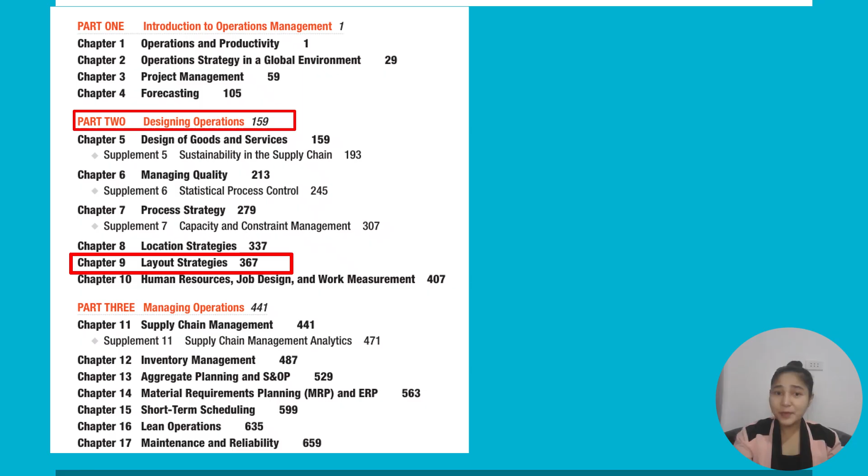By the end of today's class, you will master three key things. First, what layout actually means in business terms—it is way more strategic than just where stuff goes. Second, we will explore the different types of layouts, from your local Jollibee to SM's massive malls to Mercury Drug's efficient store operations. Third, we will dive into the math behind it, specifically how to design process layouts and balance assembly lines. Think of this as your toolkit for solving real-world space and efficiency puzzles that every manager faces.

So what is layout? Well, layout is not just about making things look pretty. It's pure strategy. Think about when you walk into a Jollibee versus a traditional Filipino carinderia—same goal, feed people, but completely different layouts. Jollibee's counter system gets you in and out fast, while the carinderia lets you see all the dishes spread out to tempt you. That is layout in action. Every choice about where to put equipment, people, and workstations directly impacts productivity, costs, and whether the business hits its targets.

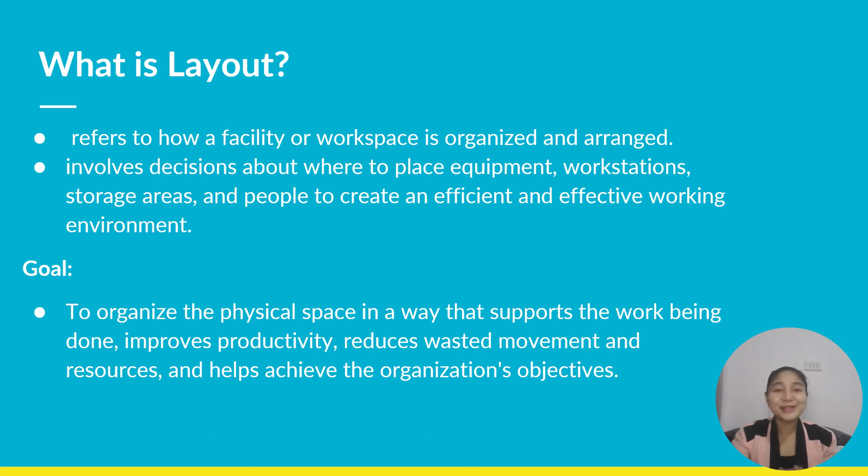Now notice retail layouts—this is where psychology meets business. The core principle is very simple: sales and profitability vary directly with customer exposure to products. Retailers strategically arrange items to catch your eye and encourage you to buy more. A perfect example is, why do you think SM Supermarket puts the milk and bread at the back of the store? It's because they force you to walk past hundreds of other products first. Every aisle, every shelf placement, every end cap design is calculated to maximize your spending. So at the end of your grocery trip, you think, oh my god, I don't need this, but why did I buy this? That is the strategy of every grocery or department store.

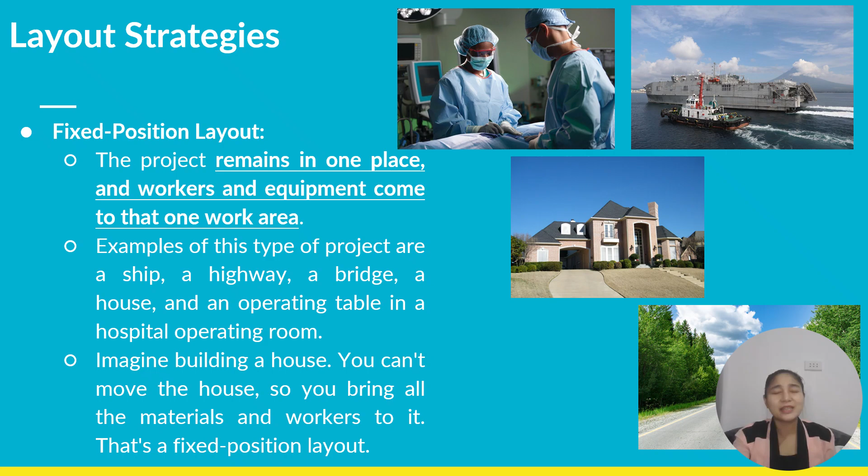You cannot move a patient mid-surgery or drag a half-built ship around the dock, right? So instead you bring all materials, tools, and specialists to that one location, it is like hosting a dinner party and the kitchen stays where it is, but you bring all the ingredients and helpers to it. That is an example of a fixed position layout.

Now let us proceed with the process-oriented layouts. It handles wide variety by grouping similar functions together. Take note: grouping similar functions together.

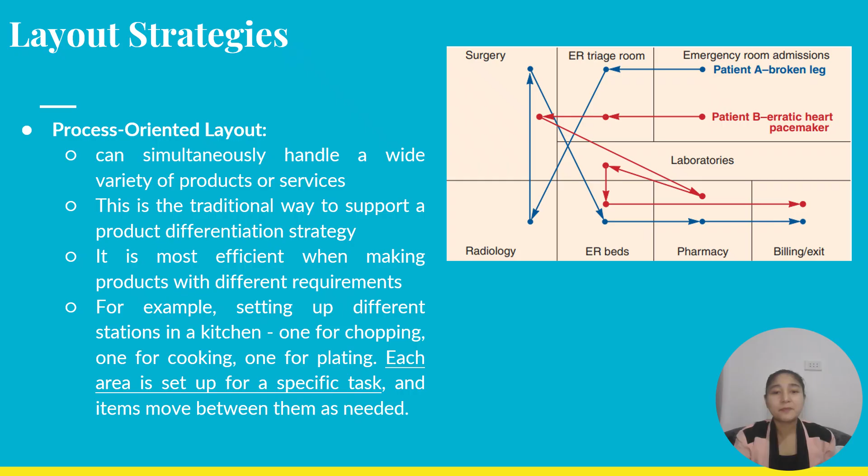Notice this hospital emergency room diagram. Do you see how patient A with a broken leg follows the blue path through triage, radiology, surgery, then to pharmacy? While patient B with heart issues takes the red route through different departments. Each area, such as surgery, radiology, and pharmacy, is set up for specific tasks, just like having separate kitchen stations for chopping, cooking, and plating. So patients flow between departments based on their unique needs.

So let's go to these work cells. Work cells completely revolutionized traditional manufacturing by reorganizing people and machines from scattered departments into focused, self-contained teams.

Look at these diagrams. The bottom diagram shows the old way: linear assembly lines, where workers stand in a row, each doing one repetitive task.

As you noticed, the top diagram shows you a work cell, with workers arranged in a compact U-shaped or circle around the materials and equipment. Here is why this matters.

In the traditional setup, if one worker is absent or a machine breaks down, the entire line stops. But in work cells, team members are cross-trained on multiple tasks, so they can help each other and adapt quickly. The U-shaped design means shorter walking distances, better communication, and faster problem solving.

These cells are used when you have enough volume to justify dedicating equipment and people to one product family, like all variants of iPhone cases or different sizes of the same jeepney part. The beauty is flexibility. When demand changes or you need to switch to a new product design, you can reconfigure the cell quickly without disrupting the entire factory. It is like having specialized teams that can pivot fast while maintaining quality and efficiency.

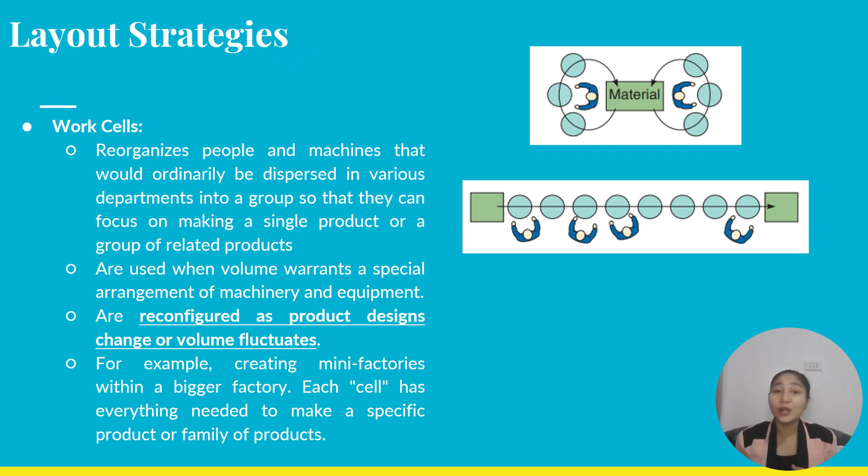Let us try this one wherein we improved work cell A and work cell B. Note that in both A and B, the U-shaped work cell can reduce material and employee movement. The U shape may also reduce space requirements, enhance communication, cut the number of workers, and make inspection easier.

So let us focus here in work cell A. In work cell A, this is the current layout wherein the workers are in small closed areas. Then we improved this work cell wherein we cross-trained workers that can assist each other and may be able to add a third worker as added output is needed. So from this current layout, we improve it to this layout.

Now, as you can see in these diagrams, I want to explain in detail. We're still in work cell A, wherein there is a transformation from isolated to collaborative work. As you can see in this left diagram, kindly focus on my pointer to follow. It really shows the current problematic layout, as I said earlier. Workers here are trapped in small, closed areas around the material section.

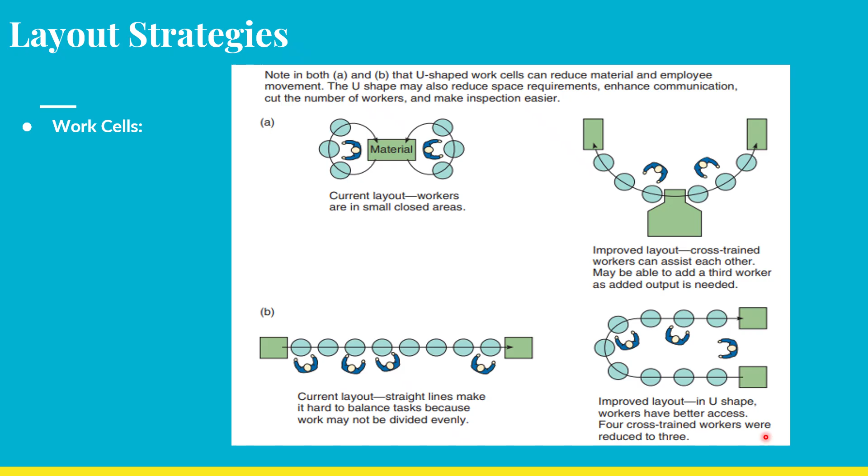So the key breakthrough here is that 4 cross-trained workers were reduced to 3. As you can see, you have 4 workers and then it is reduced to 3, that's a 25% labor reduction while maintaining the same output. This happens because workers can share tasks, help each other during busy periods, and eliminate the wasted time that comes from rigid job assignments. This U-shape is revolutionary because it combines the efficiency of specialization with the flexibility of teamwork.

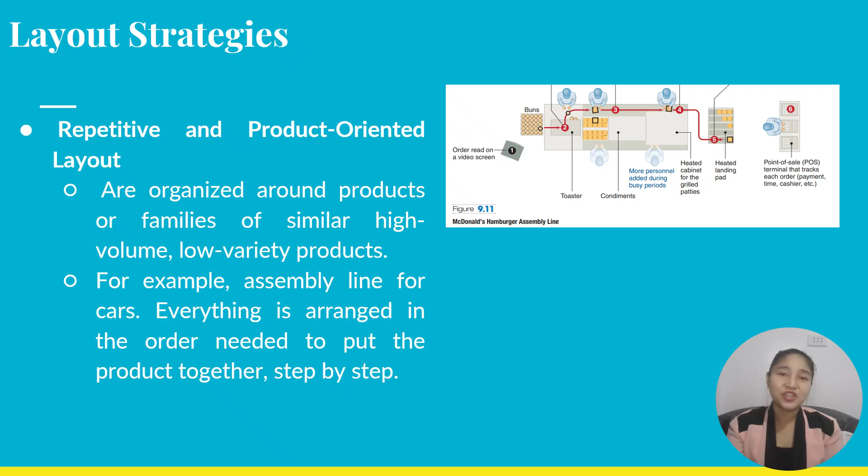So let's proceed here to the product-oriented layouts. It comes in two types. The first one is the fabrication lines, which builds individual components on a series of machines, like how San Miguel Corporation makes bottle caps, or how steel mills roll metal sheets.

The second one is the assembly lines, which put those fabricated parts together at workstations, like how Mitsubishi assembles jeepneys in their Cainta plant in Manila. The key challenge for both is achieving perfect balance. Every workstation must take the same time, or you create expensive bottlenecks. There should be a balance so you have no bottlenecks at all.

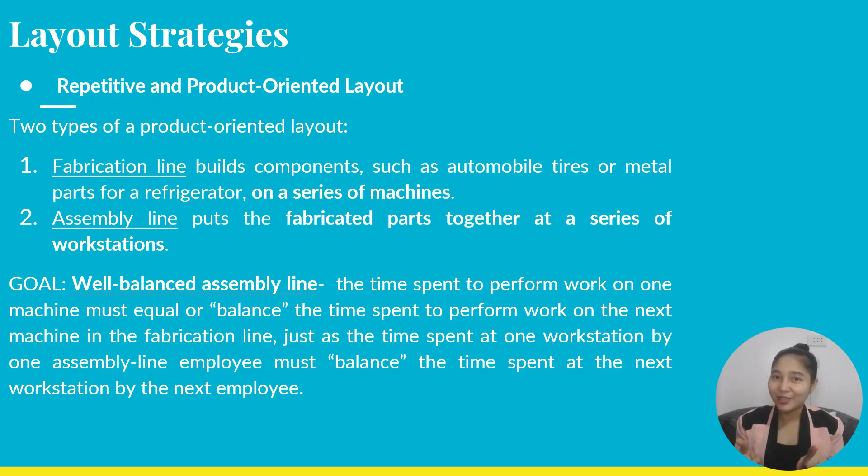So a good layout requires careful planning of three critical areas. The first one is the material handling equipment, deciding whether you need conveyor belts like in Jollibee kitchens, cranes like in shipping ports, or robot carts like Amazon warehouses. Second is the capacity and space requirements, figuring out how much room people and machines need to work safely, considering the noise, the temperature, and breathing room around the equipment.

And finally is your environment and aesthetics, making the workplace pleasant with proper windows, plants, and walls that would improve airflow, reduce noise, and give workers privacy.

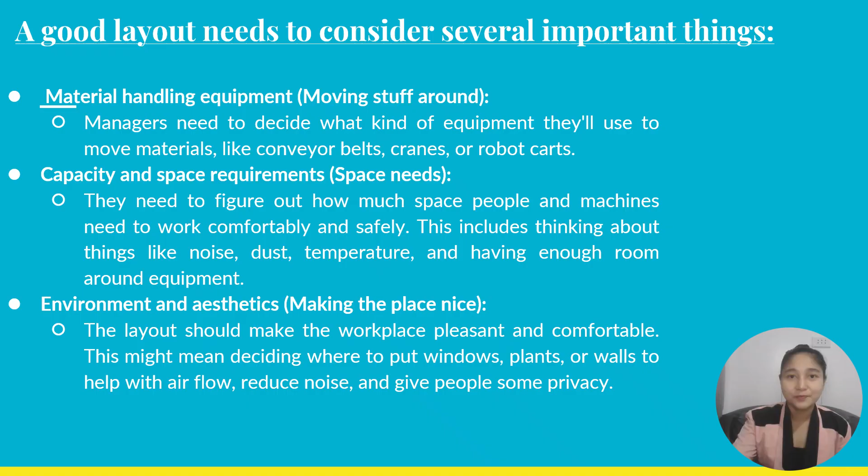So two more critical layout considerations. The first one is flows of information. The layout must help people communicate easily. This means deciding whether to use open offices for collaboration or private ones for focused work, and positioning teams that work together near each other.

Now, the second is the cost of moving between work areas. Some materials are trickier to move than others. Moving hot metal in a steel plant requires special equipment and shorter distances, while moving paperwork is very easy. Smart layouts put areas that exchange difficult to move materials right next to each other.

Okay, so how do you actually evaluate if a layout is working? Think of yourself as a detective. First, go walk around the facility. Do not just look at blueprints. You have to get your feet dirty and see what is really happening.

Then work through your checklist systematically, jotting down specific observations, like workers are constantly bumping into each other here, or this machine sits idle half the day. So be honest about what is working and what is a mess. Your final report should tell the real story of whether this layout is helping or hurting the business.

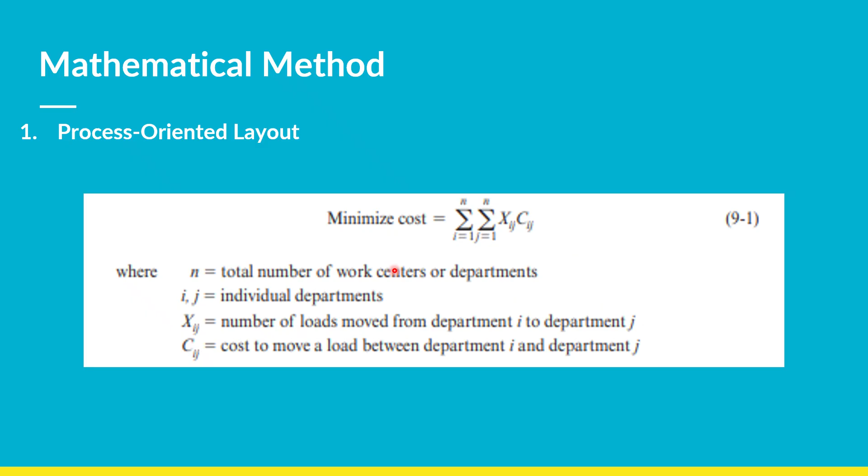Okay, so let us try this real world problem. Walter's company management wants to arrange the 6 departments of its factory in a way that will minimize interdepartmental material handling costs. So they make an initial assumption to simplify the problem: each department is 20 by 20 feet, and the building is 60 feet long and 40 feet wide.

So before we solve the problem, let us define what the problem is really all about. The problem is Walter's company wants to arrange 6 departments in their factory in order to minimize the cost of moving materials between departments. So that is the problem.

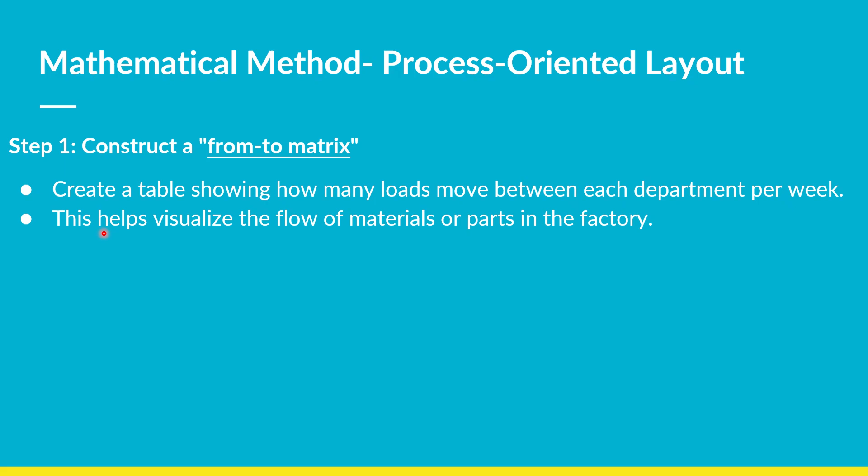So let us proceed to the next step of solving this problem. The first step is we will construct a from-to matrix, for example from assembly to painting, from assembly to machine, from assembly to receiving departments. This is an example of a from-to matrix. As you can see, we create a table showing how many loads move between each department per week, and this will help us visualize the flow of materials or parts in the factory.

So let's see how to read this from-to matrix. For example, how many loads are you going to transfer from painting department to receiving department? So how do we do that? Here you have the painting department, and then you will transfer the load to receiving department. Now the question is how many loads are you going to transfer? So here it shows 50 loads. That is how you read the from-to matrix.

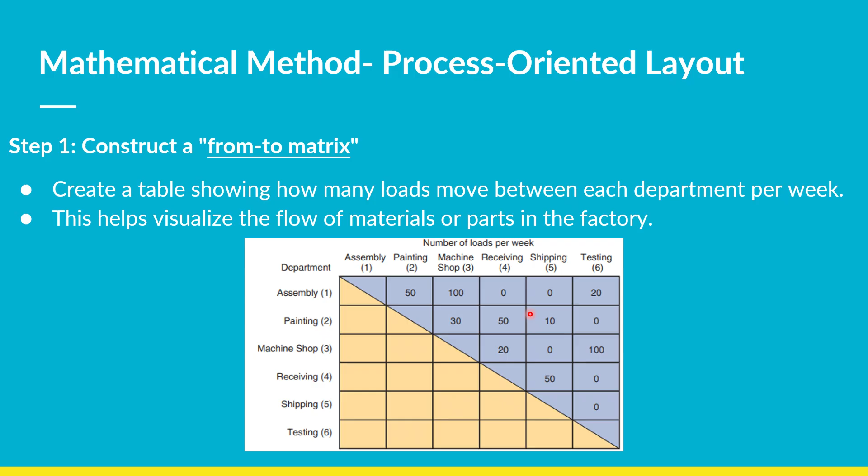Okay, so now let us proceed to step 2. In step 2, we determine space requirements, figuring out how much space each department needs. Then we have to draw a layout, like a top view, to make it easier to divide the building into areas for each department.

As given in the problem, you have 40 feet by 60 feet. This is the current layout of the departments. You have the assembly line, and beside the assembly department is the painting department. Then beside the painting department is the machine department, and beside the machine department is your testing department, and so on and so forth.

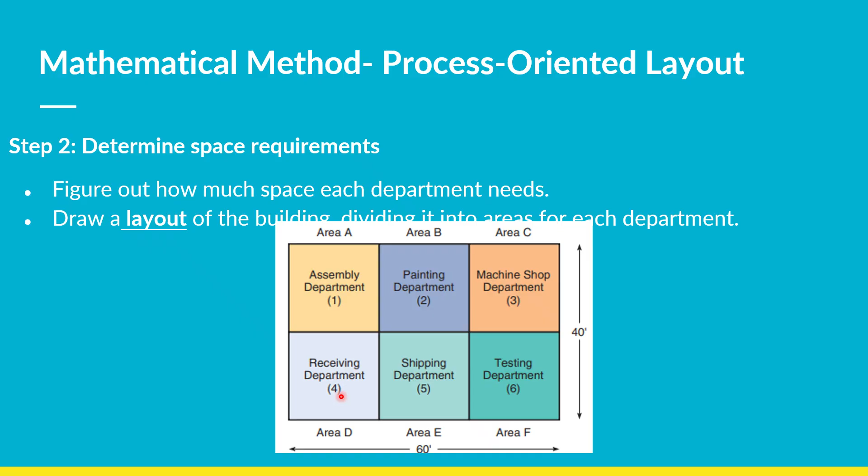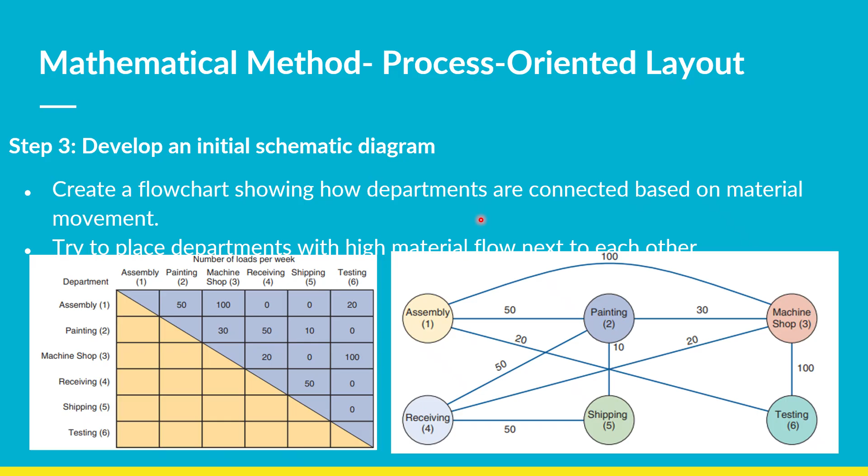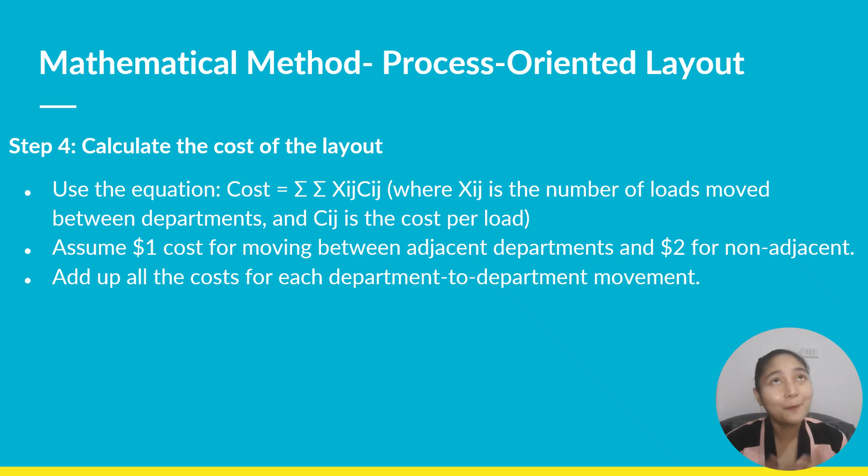Step 4 is where we crunch the numbers using our formula. We take each department pair, like assembly to painting with 50 loads, and multiply by the movement cost. If they are adjacent or beside each other, we assume $1 per load. If they are non-adjacent, we assume $2 per load. So assembly to painting might cost 50 loads times $1 equals $50 if they are neighbors, or $100 if they're far apart. We add all these individual costs to get our total layout cost, then compute different arrangements to find the best one that gives us the optimal layout cost.

So let us start. We will calculate the cost of these layouts. This is our original layout. Now, calculating the costs for each department pair using the from-to matrix and the layout, because the layout will help us identify if departments are adjacent to each other. Let's start with letter A.

In letter A, it says assembly to painting. We have here 50 loads. We check the layout to see if they are adjacent to each other. Assembly to painting, yes, they are adjacent. That's why the cost of moving the loads is 50 loads multiplied by $1, giving a total cost of $50.

Let's proceed to letter B. It says assembly to the machine. Now let us check in the layout if assembly and machine are close to each other.

So, assembly and machine. As you can see, they are not close to each other, or they are non-adjacent departments. That's why the cost of moving 100 loads is $2. You just multiply it, so that's why you have $200.

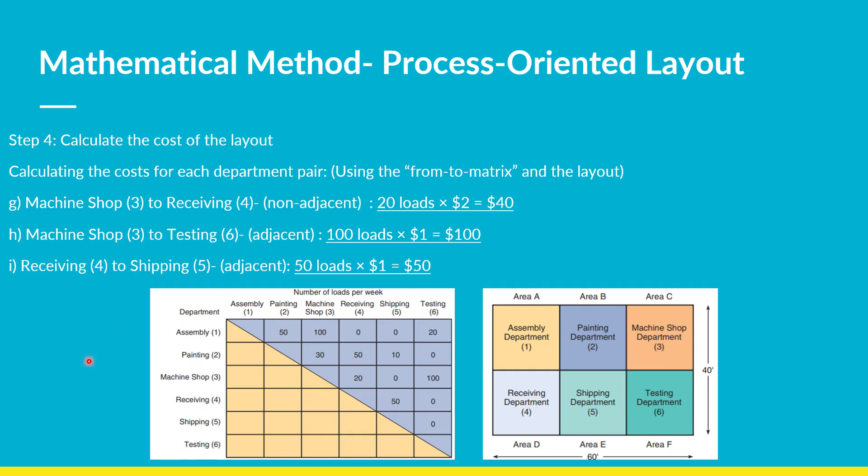So we will continue with the computation, the same process as what we did earlier. Once we are done computing the cost of movement for every department, we sum it all up. After adding it all up, we have $570. This means that this total of $570 represents the cost of moving all loads between departments in the current layout. But our goal is to find the optimal cost, so how do we do that? Maybe we can try rearranging the departments to find the minimum cost.

Since our goal is to find the minimum or optimal cost, step 5 is to improve the layout. We look for ways to reduce costs by rearranging departments. In this case, we switch assembly and painting to bring assembly closer to the machine shop, because we will be transporting higher loads from assembly to machine. Then we recalculate the cost with this new arrangement or layout.

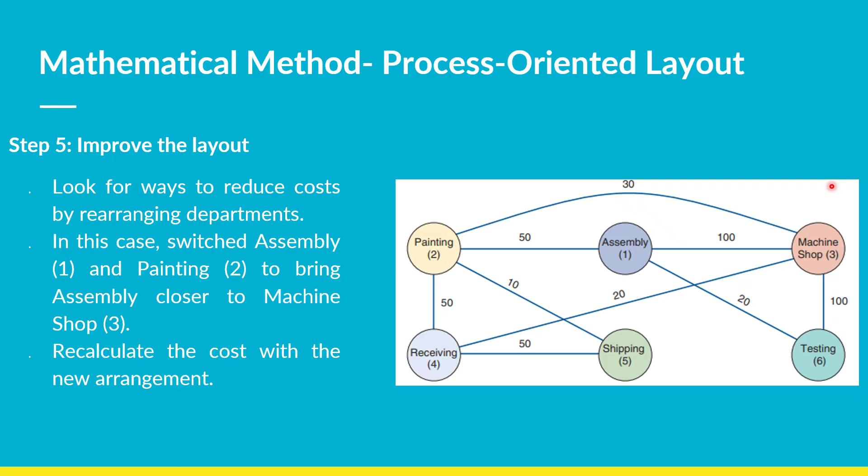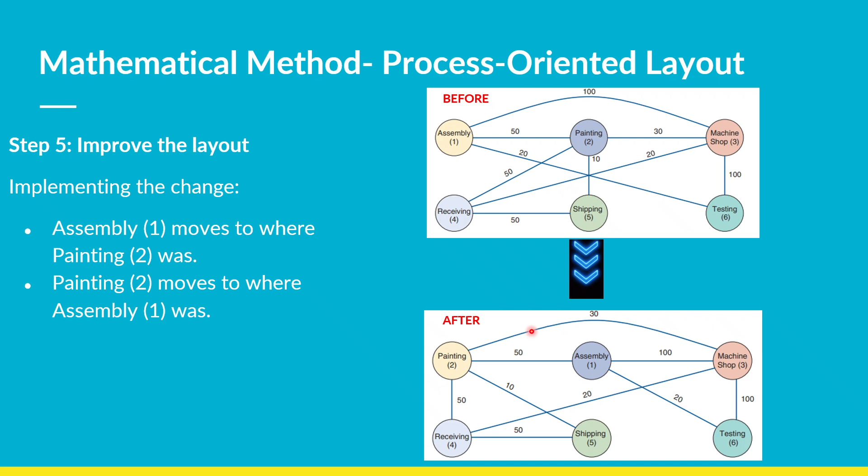So after implementing the change, this was our schematic diagram before the rearrangement. From assembly 1, it moves to where painting is, so we just switch them together. That's why our new schematic diagram is this one. We just follow the same process of computing the costs of movement of the loads from each department, multiplying the loads by the cost per movement. So how do we do that? Let me just do a quick review.

Let's say, for example, from assembly to machine shop. Assembly to machine shop has 100 loads to transfer. Now, as you can see, this is our new layout, and in this new layout they are just adjacent to each other, so the cost here is $1. We just continue the same process for the computation.

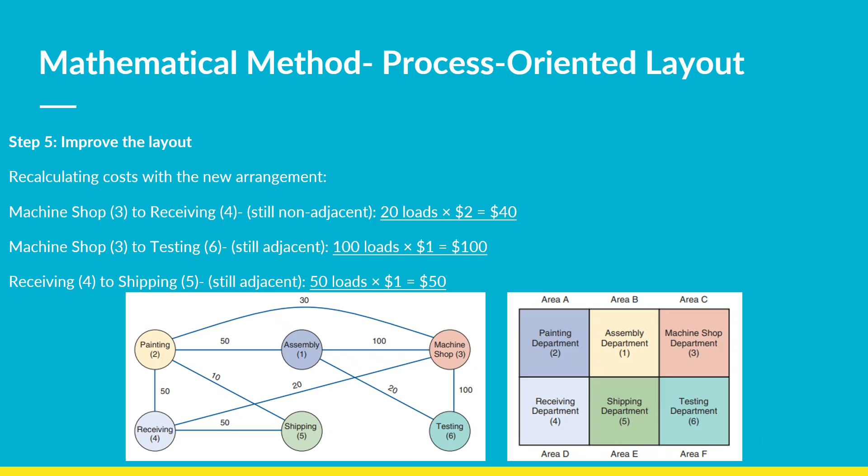And here is the payoff. As you can see, we did the same calculation method, but now our total drops to $480. That's a $90 savings, just from swapping two departments. Remember, we started at $570 with the original layout, and this simple switch, interchanging the position of the assembly and painting departments, brought us down to $480.

That represents a significant cost reduction in material handling expenses. This is the power of mathematical optimization, finding arrangements that save real money through smarter positioning of departments based on actual material flow data.

Step 6 wraps up with a clear cost-benefit analysis. As you can see, the old cost was $570, and the new cost is only $480, giving us $90 in weekly savings. That might not sound huge, but take note: multiply that by 52 weeks and you're saving $4,680 per year.

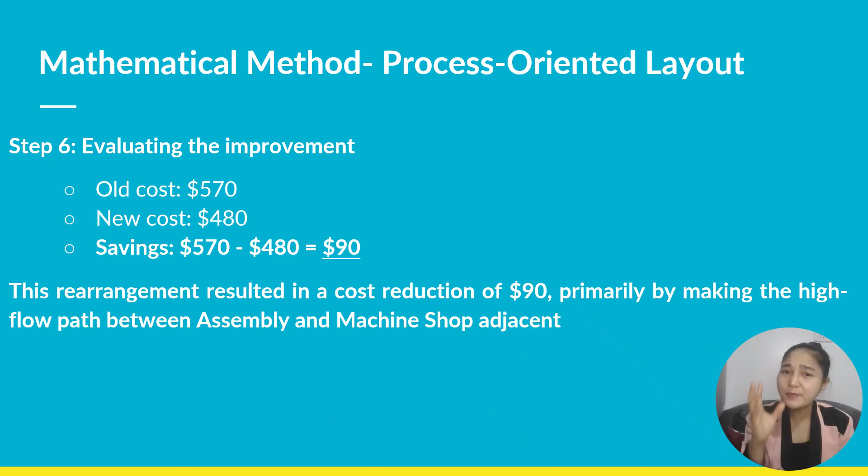Just from this one layout change, the key insight is that making assembly and machine shop adjacent eliminated expensive long-distance trips for that high-volume, 100-load flow. This demonstrates how focusing on your biggest material flows delivers the biggest cost reductions.

Okay, so now let us shift gears to work cells and their math. Remember those U-shaped teams we talked about earlier? You cannot just throw people together and hope it works. There is actually a systematic way to figure out exactly how many workers you need and how to balance their workload. We will learn to calculate something called takt time, basically the rhythm your team needs to match customer demand. It's like choreographing a dance where everyone's moves have to be perfectly timed.

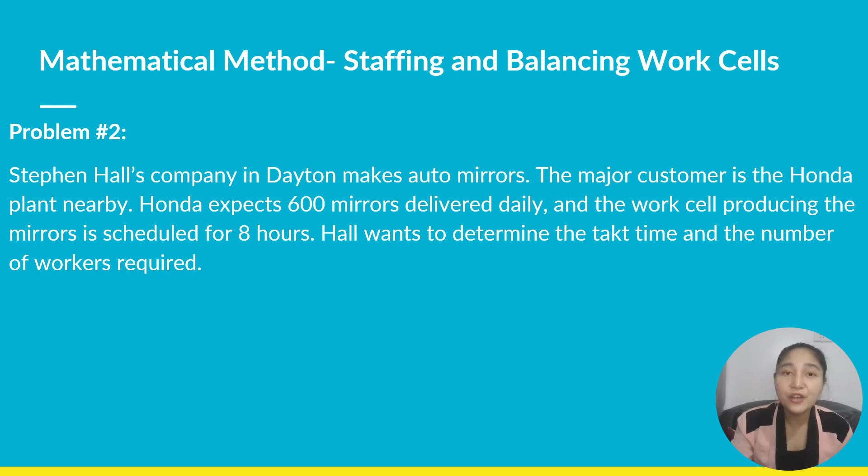Okay, so let us work through this real-world problem step by step. Stephen Hall's company makes auto mirrors for Honda, and Honda expects exactly 600 mirrors delivered every single day. The production schedule follows 8 hours of work time daily. Our goal is calculating takt time, the precise rhythm needed to meet customer demand.

Now here is the math. Takt time equals total available time divided by units required. We have 8 hours, which converts to 480 minutes or 28,800 seconds of production time. Divide that by 600 mirrors needed and you get 48 seconds per mirror.

This 48-second takt time is crucial. It means every 48 seconds, one completed mirror must come off the production line to satisfy Honda's demand. Think of it like a metronome setting the pace for the entire operation. If they are slower than 48 seconds per unit, they will fall behind and disappoint Honda. If they are faster, they will overproduce and waste resources. This takt time becomes the heartbeat of the entire work cell—every task, every worker movement, every process step must be designed around this 48-second rhythm.

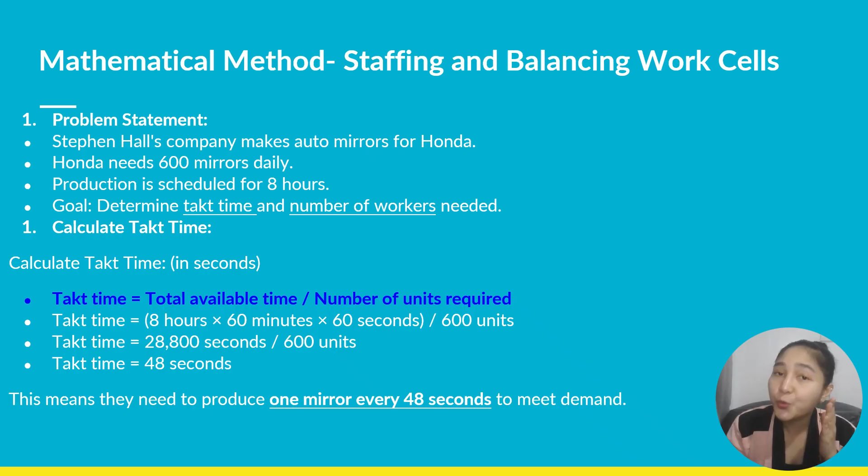So it is not just a target. It is the fundamental constraint that drives all staffing, equipment, and workflow decisions in the cell.

Now here is the critical insight. Remember, our takt time was 48 seconds per mirror. But the total work content is 140 seconds. This tells us immediately that one person cannot possibly make a complete mirror in 48 seconds because the work itself takes nearly 3 times longer.

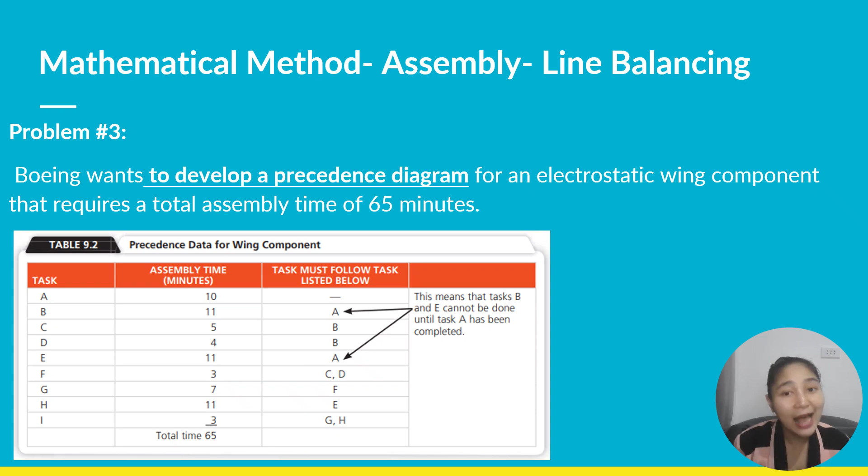Task B takes 11 minutes but must follow task A. Task C needs 5 minutes and also follows B. So the key insight is understanding these dependencies. You cannot start task E, take note, until task A is completely finished. This precedence relationship determines how we will arrange our assembly line stations.

Okay, so now kindly focus on this table below. This is the given, right? You have here the first column, you have the tasks. The second column is the assembly time in minutes, and the third column is the task that must follow the task listed below. Meaning all of these tasks in the third column must be finished before you can proceed to this main task in the first column.

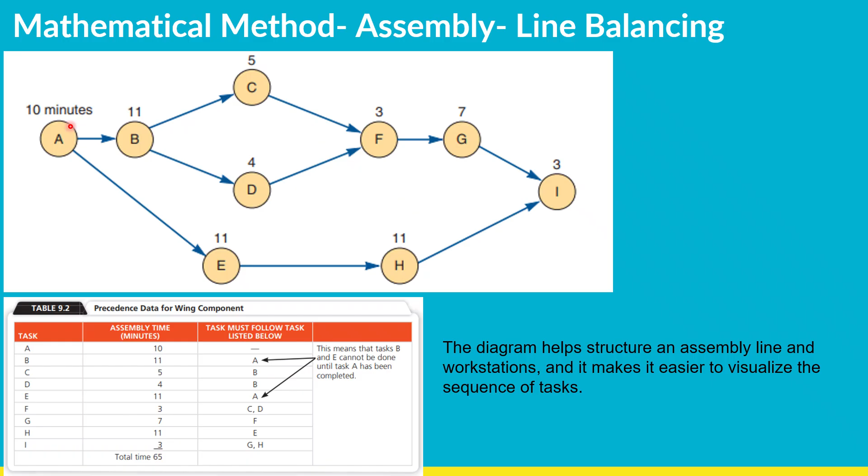So now we move from precedence diagrams to actual line balancing. The first step is of course calculating the cycle time. This determines the maximum time allowed at each workstation to meet production targets. The formula is very simple: production time available per day divided by units required per day.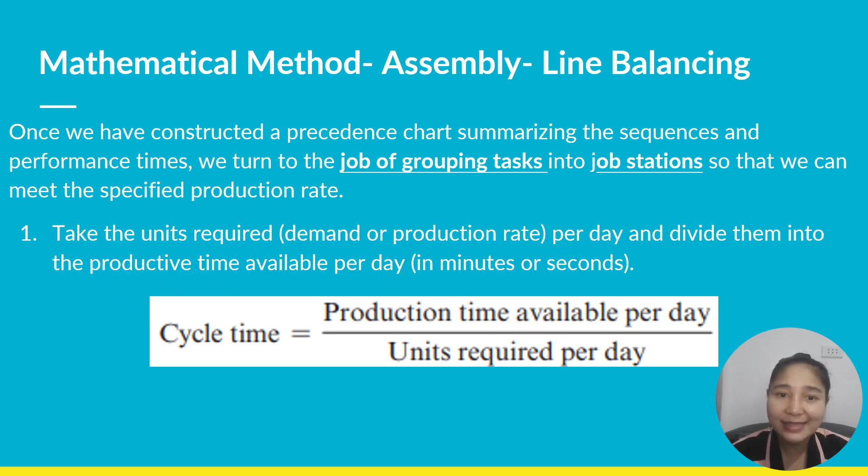So if Boeing has 480 minutes available daily and needs to produce 40 wing components, then the cycle time is 12 minutes per workstation. This means every station must complete its assigned tasks within 12 minutes to maintain the production flow.

Step 2 calculates the theoretical minimum workstations needed. Take the total task duration time, that's 65 minutes of work required to build one wing component, and divide by your cycle time of 12 minutes. So 65 divided by 12 equals 5.42 workstations. Since you cannot have 0.42 of a workstation, you round it up to 6 stations minimum. This gives you the absolute lower bound, meaning you need at least 6 workstations. The actual solution might require more due to precedence constraints.

Step 3 is where the real puzzle solving begins: actually assigning tasks to workstations while respecting precedence constraints and staying within the 12-minute cycle time. This involves strategic decisions. Can we group task A with task B at station 1? Does that violate any precedence rules? Are we staying under 12 minutes? It's like fitting puzzle pieces together where each piece has timing constraints and dependency rules. So we will use heuristics, systematic rules of thumb, to guide these assignments and create an efficient, balanced line.

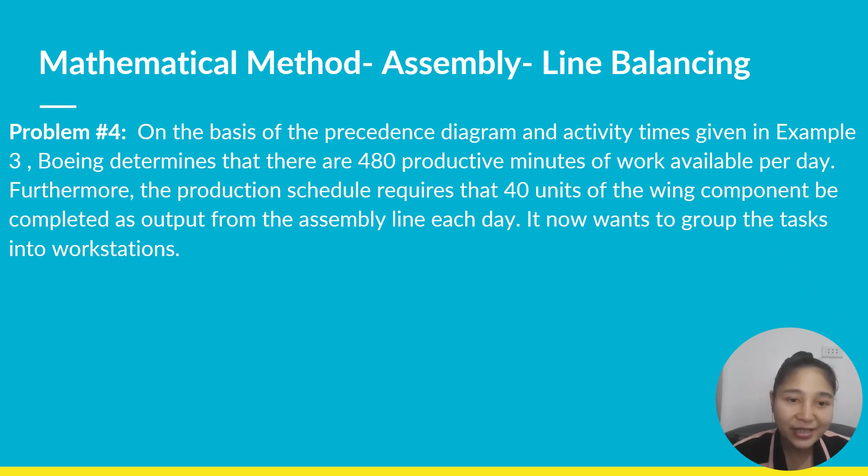Let us recap the complete problem setup. Boeing needs to produce 40 wing components daily with 480 minutes of available work time. Using our formulas, cycle time equals 480 minutes divided by 40 units, giving us 12 minutes per workstation. The theoretical minimum workstations equals 65 total minutes divided by the 12-minute cycle time, which is 5.42, rounded up to 6 stations. Now the challenge is actually assigning our 9 tasks from A through I to these stations while respecting precedence constraints and staying within the 12-minute cycle time limit.

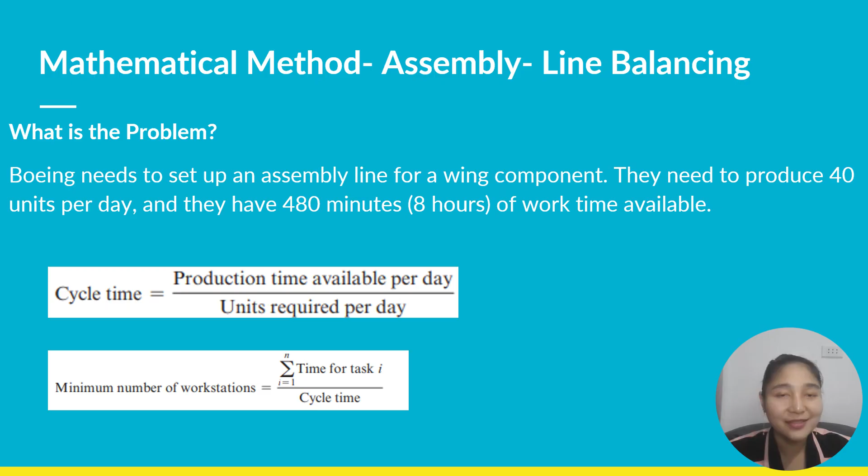Step 1 establishes the fundamental rhythm that drives everything else in assembly line balancing. Cycle time is the maximum allowable time at each workstation to meet production demand. It is your constraint that cannot be violated. The calculation is straightforward: 480 minutes available divided by 40 units needed, which equals 12 minutes per unit.

But understanding what this means is very crucial. This 12-minute cycle time becomes the heartbeat of your entire assembly line. Every single workstation must complete its assigned tasks within exactly 12 minutes, or the entire line breaks down. Think of it like a relay race, where every runner must finish their leg in exactly 12 minutes. So if station 3 takes 15 minutes while station 1 only takes 8 minutes, you create a bottleneck there.

Now, the entire line can only move as fast as the slowest station. So what will happen? Products will pile up behind station 3, while station 4 sits idle waiting for work.

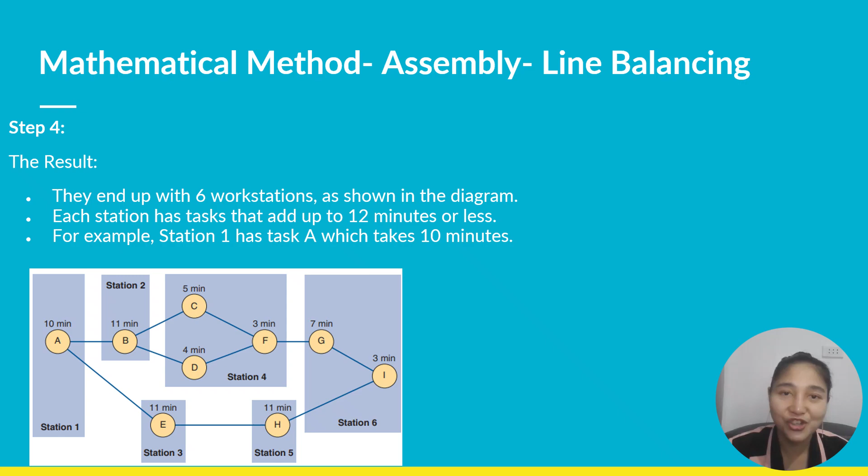Now, have you noticed? Every station stays at or under our 12-minute cycle time limit, while of course respecting all the precedence relationships. So now once we have our line balanced, we need to evaluate how good our solution really is. There are 2 key metrics.

So the first one is efficiency. We divide total task times by actual workstations times the longest cycle time. For Boeing's solution, that's 65 minutes divided by 6 stations times 12 minutes, giving us 90.3% efficiency. Now second is our idle time.

Idle time is the wasted time when workers are not productive. We calculate actual stations times cycle time minus our total task times. So higher efficiency and lower idle time mean a better balanced line.

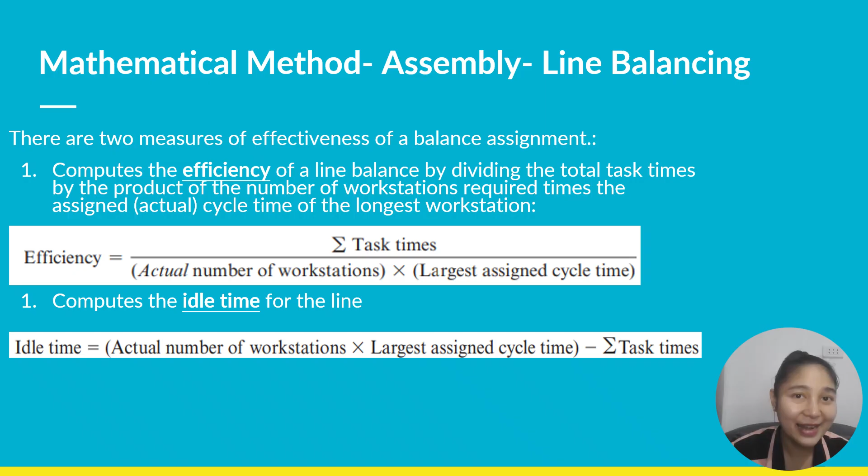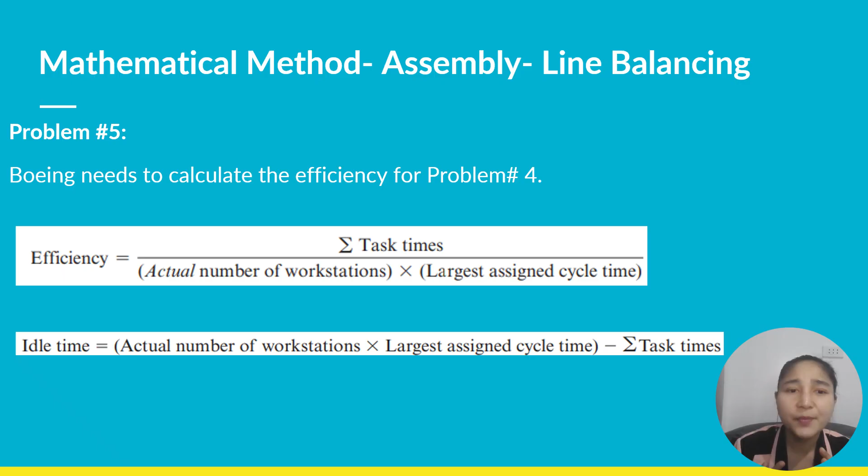So the efficiency formula is total task times divided by actual number of workstations multiplied by the largest assigned cycle time. We also have the idle time formula: the actual number of workstations multiplied by the largest assigned cycle time minus the sum of all the task times. These two formulas let us measure how well balanced our assembly line solution really is and identify any wasted capacity in the system.

I actually mentioned this earlier, but let's repeat, okay, to make sure that you understand. Boeing has given us their current assembly line setup: 6 workstations, each with a 12-minute cycle time, and a total of 65 minutes of actual work content spread across all stations. So they want to know their efficiency.

The efficiency formula, okay, I have said this earlier, but I will just repeat: efficiency is always equal to total task time divided by the number of workstations multiplied by the cycle time. So in this case, let's calculate 65 minutes divided by 6 stations multiplied by 12 minutes, which gives us 65 over 72, equal to 90.3%.

Now, what does this 90.3% tell us? This number is not just abstract, okay? It means that roughly 10% of the time, workers are standing idle.

Now, in the real world, that is actually pretty decent because most assembly lines struggle to get above 85% efficiency because of balancing constraints. Think about it—you cannot always divide work perfectly evenly. That's the reality. Some tasks cannot be split, some have precedence requirements, and some need specific equipment at certain stations.

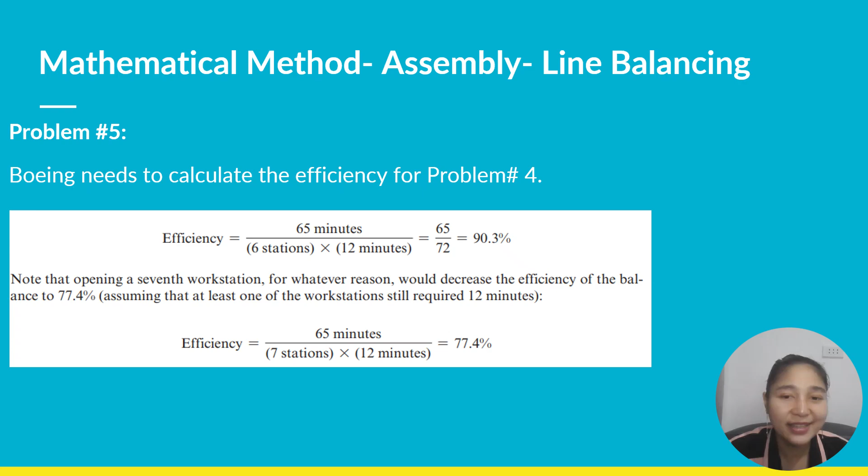Remember, efficiency is not everything, but it is a critical metric for understanding how well you're utilizing your resources. Now, a 90.3% efficient line that produces quality products reliably is often better than chasing that last few percent and creating worker stress and quality issues.

Okay, so now let us really dig into why the seventh workstation causes problems, okay? This is crucial for understanding assembly line economics. When you add a seventh station, you are spreading the same 65 minutes of actual work across more stations.

I want you to think about it mathematically, okay? You still have the same numerator—you have 65 minutes of work. But your denominator grows from 72 to 84. That is 7 stations multiplied by 12 minutes.

Now here's what is actually happening on the factory floor. With 7 stations instead of 6, you are not magically creating more work to do. You are just redistributing the same tasks. This means more idle hands, meaning each station now has even more downtime on average.

Next is higher labor costs—you are paying another full worker's salary. Next is more space required—that seventh station takes up available floor space. And then next is the additional equipment—another workstation means more tools, fixtures, and maintenance.

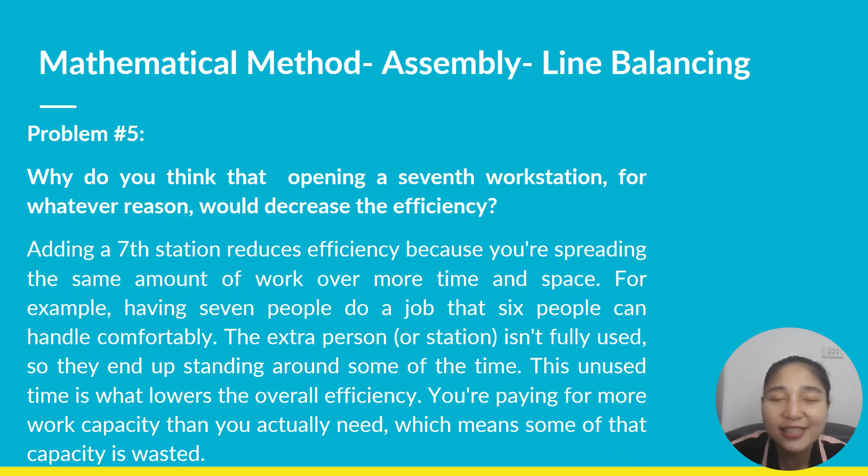So now remember, adding capacity is not always about adding stations. It is often about optimizing what you already have.

So let us work through these together. We have 6 stations, right, and then each with 12 minutes cycle time. So that gives us 72 minutes of total available time—that is if everyone worked the full 12 minutes at every station. But we know from the problem that we only have 65 minutes of actual work to do.

So 72 minus 65 equals 7 minutes of idle time per cycle. Now 7 minutes doesn't sound terrible, right? But let me show you what this really means. If Boeing runs this line for one 8-hour shift, that is 40 cycles. Multiply that 7 minutes by 40 cycles, and we are talking 280 minutes of workers standing around per shift.